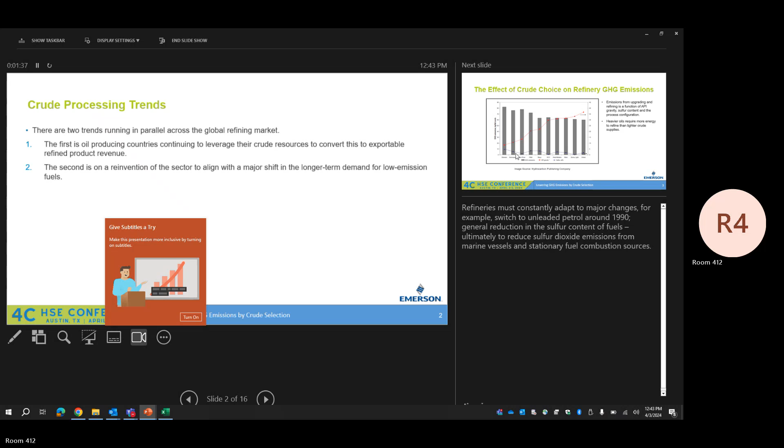So what I have here is a generic graph that was published by the Hydrocarbon Publishing Company. Now take this graph with a grain of salt because the greenhouse gas emissions can be quantified in different ways, and it's certainly dependent on the configuration of a refinery, the technologies used, as well as the efficiencies of those technologies. And so crude is often categorized by the API gravity, which is essentially a density measurement, and the sulfur content. You'll hear sweet crude, meaning it has a low amount of sulfur, and sour, meaning it has a large amount of sulfur.

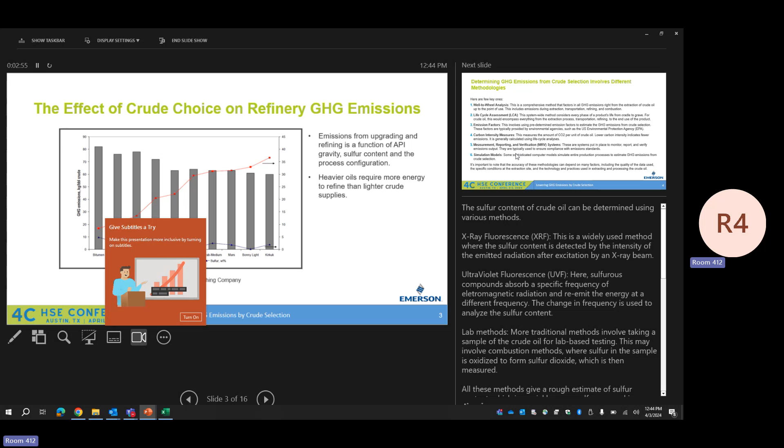And here, as you can see, if someone was looking at crude selection to reduce greenhouse gas emissions, that doesn't always correlate to low sulfur, which can convert to SO2 emissions when combusted. Now you can desulfurize via hydrotreating, but that will require more hydrogen usage. And so that'll also result in more energy intensity as well because you're using energy to create the hydrogen. Another factor to consider is that the sulfur is going to result in some corrosion mechanisms such as sulfidic or sour corrosion. So these are things to look out for when you're selecting your crude feedstock.

And now here I've highlighted some key methodologies on how greenhouse gas emissions are quantified. The first being the well-to-wheel analysis, and that's essentially tracking the crude from extraction to refining and then eventually road transportation use. Next is life cycle assessment, which is a more holistic approach. It actually considers the materials being gathered and the greenhouse gas emissions generated from the materials needed, not just looking at the crude. And then there's emission factors.

A lot of times you'll get these emission factors from EPA. Always look at what the emission rating is for those emission factors. If it's got a D rating, that's not a good sign. Maybe you might want to generate your own site-specific emission factors to get a better idea of what you're truly emitting. Next is the carbon intensity measures. That quantifies the amount of CO2 generated per unit of crude, and oftentimes that is associated with a life cycle analysis. And number 5 here, measurement, reporting, and verification systems.

A lot of that is covered in 40 CFR 98 subparts Y and C. So those are your different tier calculations, which include CEMS and using emission factors in the equations they've laid out there. Number 6 is simulation models. So that's something I'm going to be talking to you guys about. Emerson is working with AspenTech to figure out how we can work together, because we provide the instrumentation, which will give you quality data that can be put into these simulation models. So don't just look at software in itself. That's how you get the garbage in, garbage out scenario.

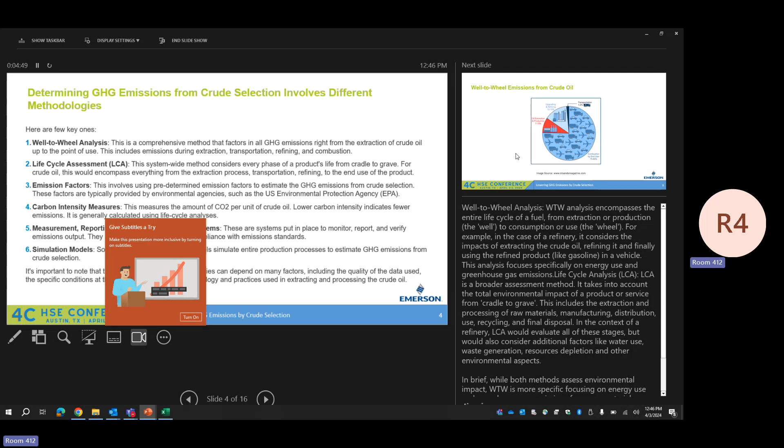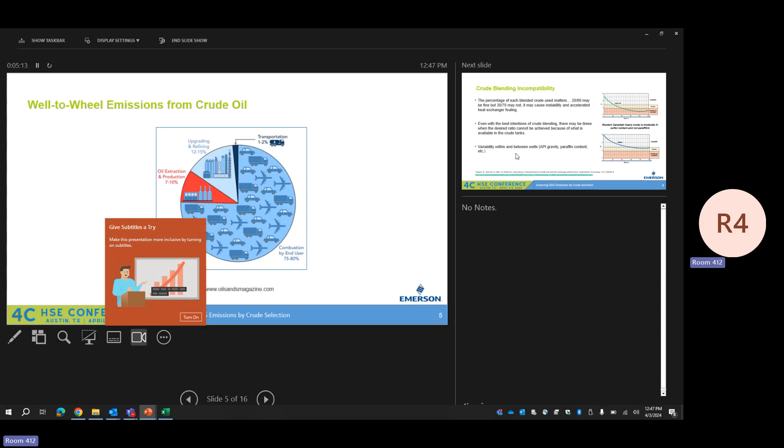So here I have a well-to-wheel analysis for crude oil. And as you can see, the majority is from the end user being combusted. So really what refineries have control over is like 12 to 15%, and that's including the upgrading. And what makes renewable feedstock so appealing is the fact that they don't have the oil extraction and production piece, that's 7 to 10%.

So crude blending is something you should really look into, because say you have 2 different types of crude, maybe 20 to 80% of these 2 different types might be fine, but then if you shift from that to 30 to 70, you might actually cause some fouling and shutdowns in your heat exchangers as well. So that blend ratio is something that should heavily be controlled and monitored.

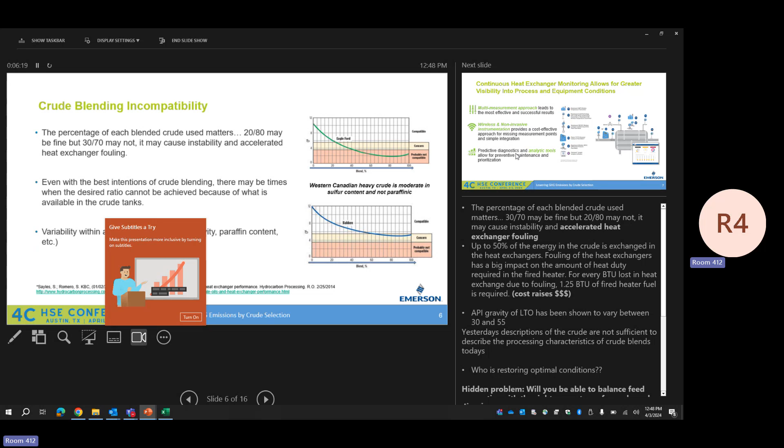Another thing to look out for is the paraffinic content in crude, because that'll cause wax deposits to build up in the pipelines. And then you will need to do either some dilution or insulation, and that will result in a higher energy intensity as well, because you use higher temperatures to ensure the fluidity through the pipelines. So you might have heavy crude, which is moderate in sulfur, but not in paraffinic. So these are all things that you should consider.

So this is a fully instrumented heat exchanger that I have here using all Emerson's instrumentation. We have a lot of wireless products that we've showcased before. I'm sure if you've sat in on any of the other presentations, you've heard of our X-Well technology, and what that does is takes the ambient temperature and the temperature of the surface of the pipe, and it uses a thermal conductivity algorithm to figure out what the process temperature is inside.

But what's new to our profile is this Flexim flow meter, which is a clamp-on ultrasonic flow meter, and it can detect buildup in your pipes, and it's perfect for viscous and high temp applications as well. It could also simultaneously measure 2 lines at once. Eventually, this will be built into our diagnostic tools, but right now they have their own. What I have here is a screenshot of our PlantWeb Insight app for heat exchanger monitoring. So all of this data can eventually be used and correlated to your crude slate.

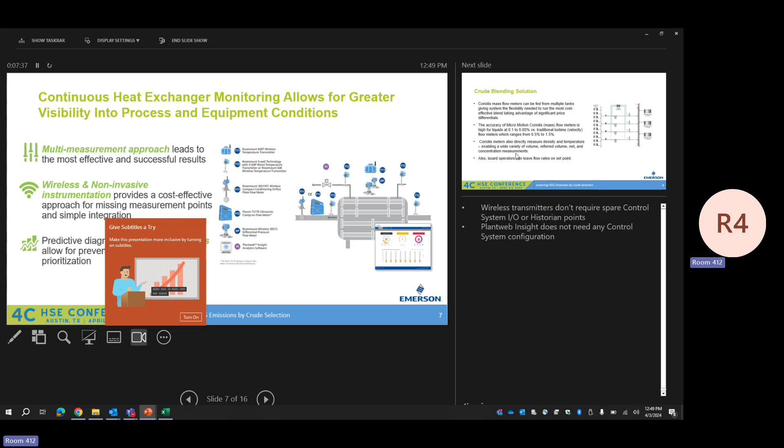And so here is an example of a crude blending solution. So what you see here is multiple crude tanks using a Coriolis meter, and they have a blend controller. So then you can make sure that you're staying at that 20 to 80 and not reaching that 30 to 70. In the past, they used to use turbine meters, and those are not very accurate. As you can see, it's about 0.5 to 1.5 versus a Coriolis mass flow meter, which is 0.1 to 0.05% accuracy. And with that Coriolis meter, you're getting not only a direct mass measurement, but also direct temperature and density.

So there's a temperature sensor that's built in, and the mass is calculated via inertia, and then the density is calculated by the resonance frequency between the oscillating tubes. So with all of that, you have your mass and density. You could then have referred volume and net concentration measurements. And then with the blend controller here, as I said, you can have a set point.

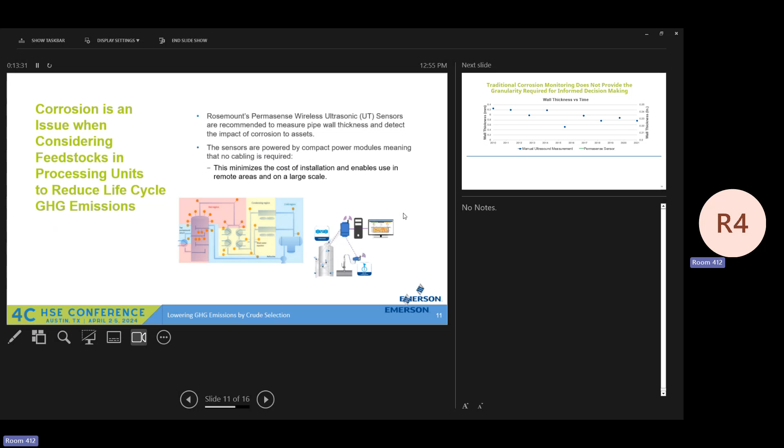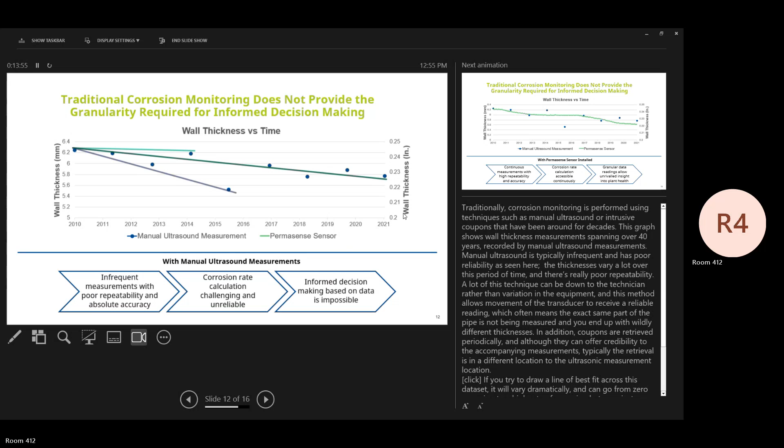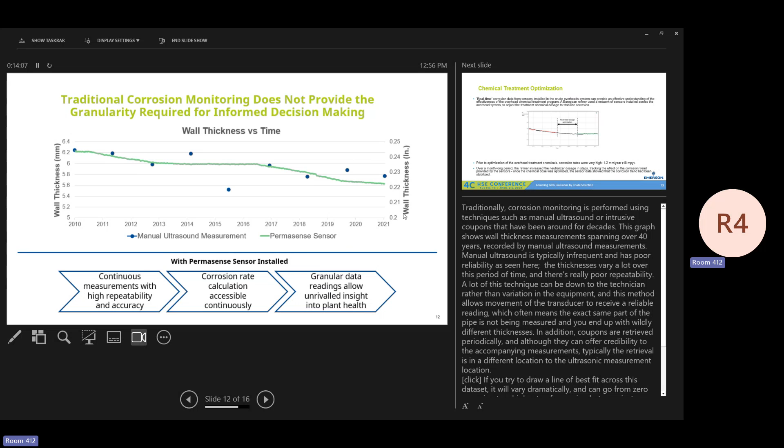And so here's an example of the data points that you would get from manual ultrasound measurements. A lot of times you'll get inconsistencies because of human error. And now let's look at the possible trend lines you could get with this data. And now let's compare it to PermaSense, which is retrieving 2 data points per day. So you have a solid trend line and you've kicked out the outlier data points.

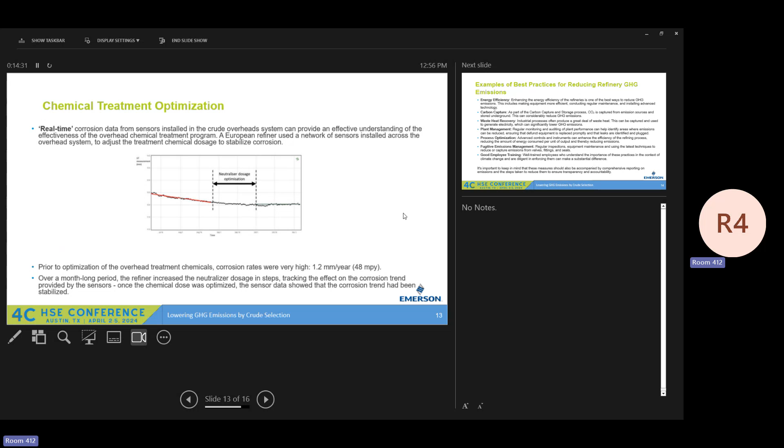And so injection to inhibit corrosion. This is an example from a European refiner who used our sensors to figure out exactly when to inject because it is very expensive to do these injections. In fact, they use Coriolis meters just for the chemical injection as well.

So overall, these are some of the best practices. You know, energy efficiency is a big one. In fact, with my team I've developed an entire ebook for best practices for energy efficiency with steam distribution, combustion control, and distillation column optimization. All that stuff, if you would like, feel free to approach me and I'll give you more information on that.

Carbon capture, we are developing more content on point source carbon capture. We've worked with some large companies to achieve this. It's been done in Canada, but we're trying to increase the carbon capture efficiency in the future. Then there's waste heat recovery. That's certainly very important and an easy way to reduce emissions and just, you know, any utilities that you use.

And as well as plant management, just making sure that you have the regular monitoring and auditing of the plant performance, process optimization, which involves controls and instrumentation, and then fugitive emissions management, which there's several discussions about here at 4C, and then also good employee training. So making sure that everybody has the same values the corporate sets. So not just for environmental friendliness, but also with safety.

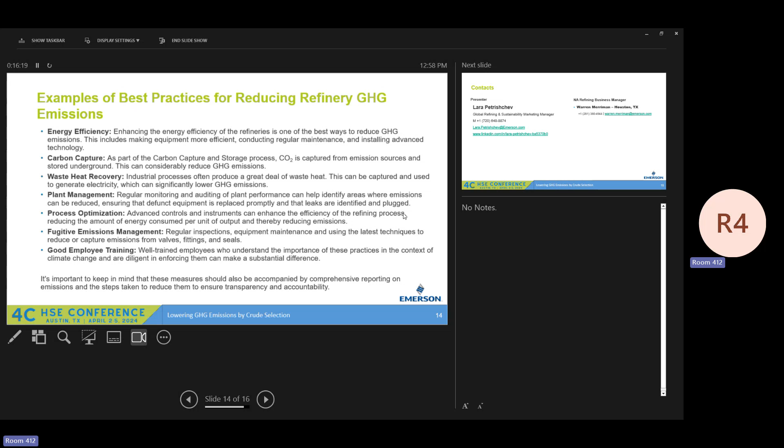Because when we talk about corrosion, you have to monitor that also for a safety aspect. So you're not putting someone in an environment where there's toxic fumes or flammable fumes being released into the atmosphere. So that is all I had.

However, I'm going to go back to my video, and hopefully someone is coming from IT to help us out. So one moment, I will be right back and trying to find someone. Usually they're right outside the door. So please excuse me, I'll be right back.

That's okay. Negative. I'm not hearing it.

Should I keep trying? This brief demo will introduce you to AspenTech's, oh, there you go, new emissions management solution. Let's start by looking at the enterprise view for a refining company, focusing specifically on carbon scope 1 and scope 2 emissions, refining margins, and carbon taxes. It's important to note that this dynamic enterprise interface is fully responsive, able to be viewed on a large operations center video wall or a handheld mobile device.

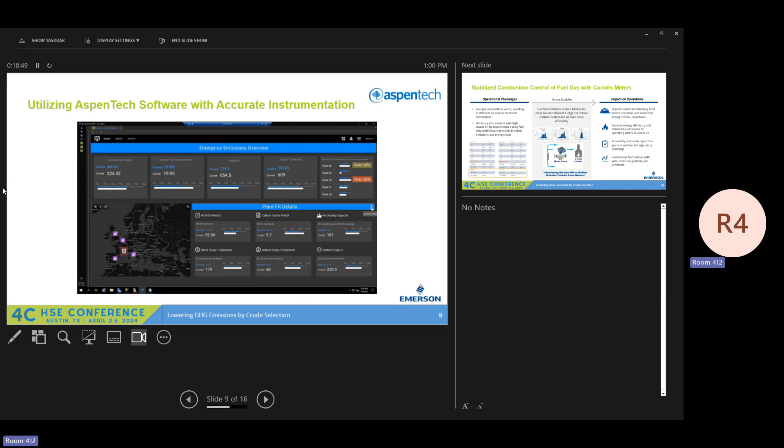This graph breaks down the major emitting process units. The blue bars indicate the planned CO2 levels, while the yellow bars show the actual emissions. You can see here the fluidized catalytic cracker, or FCC, is the largest emitter and the most over plan, followed by the site's utilities and on-site hydrogen plant.

Managers may prefer using the bar charts, but the solution also provides a flow sheet view, giving flashing red visual cues as to which units the technical team should focus on. Using the solution's integrated digital twin models, engineers and operators can easily identify major carbon emitters and recommend back to managers where to take action.

By visualizing the conditionally colored indicators in the flow sheet and then drilling down into the connected apps, we can quickly isolate major offenders and determine the root cause. In this case, emissions from the FCC, the utility system, the hydrogen network, and crude distillation units exceed the planned emission levels. A key benefit is that everyone responsible for a mitigation plan is working off the same data and same system. Plus, everyone has full visibility into what others are considering.

Before taking action, the team will want to prioritize steps based on CO2 emission and profitability associated with individual process units, and can share these steps with the sustainability and operating teams for rapid and informed decision-making. The FCC drill down helps you see the specific opportunities for improvement. Here, the process engineer accesses the same system to identify the root cause using AI-assisted models and determine operating changes, including temperature and throughput rates that can reduce CO2 emissions, while also maximizing revenue opportunity.

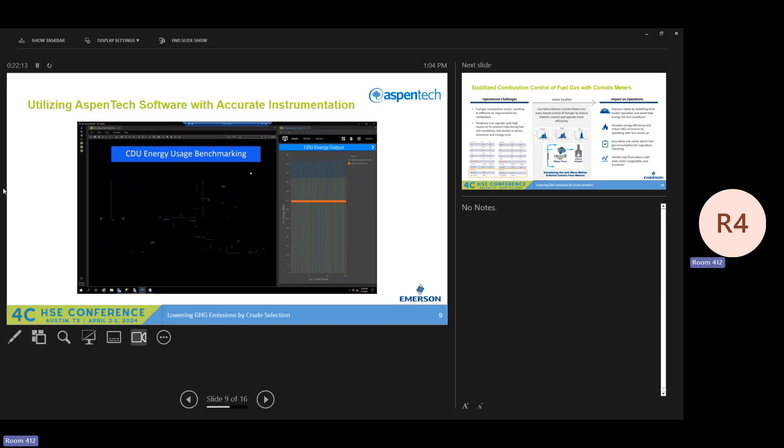Now we turn to the crude units, where a similar drill down shows that actual emission levels in the CDU are also higher than the plan. In this case, there is also a higher energy consumption than the benchmark. The cause could be poor hydraulic performance at the distillation units or fouling in the preheat heat exchanger train. We can quickly look at both with this solution.

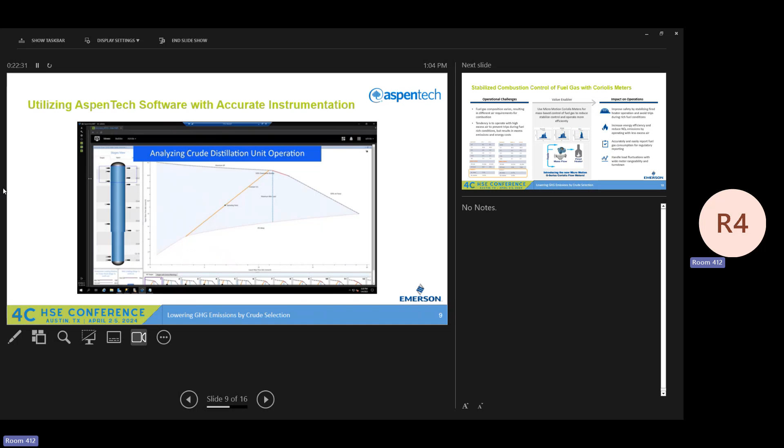A unique and powerful visual display shows the internal performance of the column. It's easily readable by others in operations. In this case, we quickly see that hydraulic profiles are within the recommended operating envelope, so that is not the cause of the emissions delta. Turning to a more detailed flow sheet, we see a heat exchanger is flashing, leading the technical team to check the fouling rate in this unit. Sure enough, one of the heat exchangers is at a threshold, meaning reduced efficiency, excess fuel consumption, and higher CO2 emissions. Okay, I won't play the entire video, but you get the gist of it.

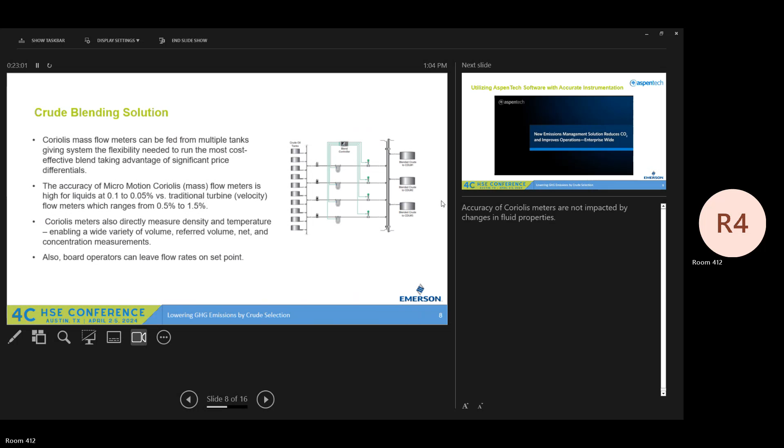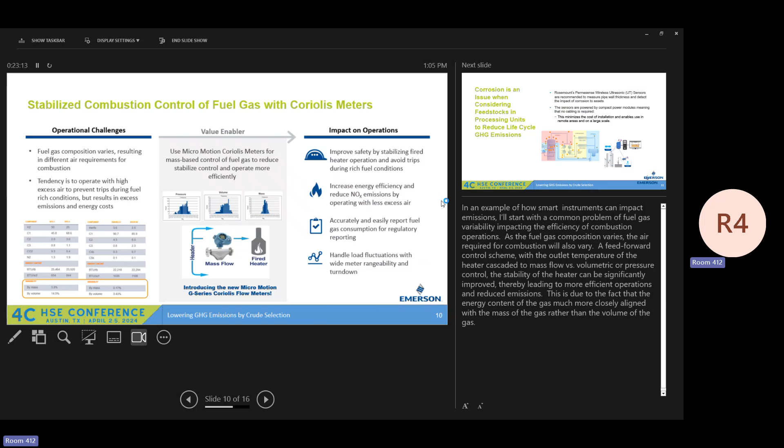And another thing I'd like to mention, when I showed you the fully instrumented heat exchanger, all that instrumentation is not required for a preheat train. You can use fewer instrumentation to monitor your preheat train. So since I've already gone through all of my slides, I would like to ask the audience if you guys have any questions for me.

Is anybody using Aspen Tech right now for any simulation models? No. Well, now since Emerson and Aspen Tech are working closely together, hopefully that will change and we can use both quality data via instrumentation and software together to provide a packaged solution.